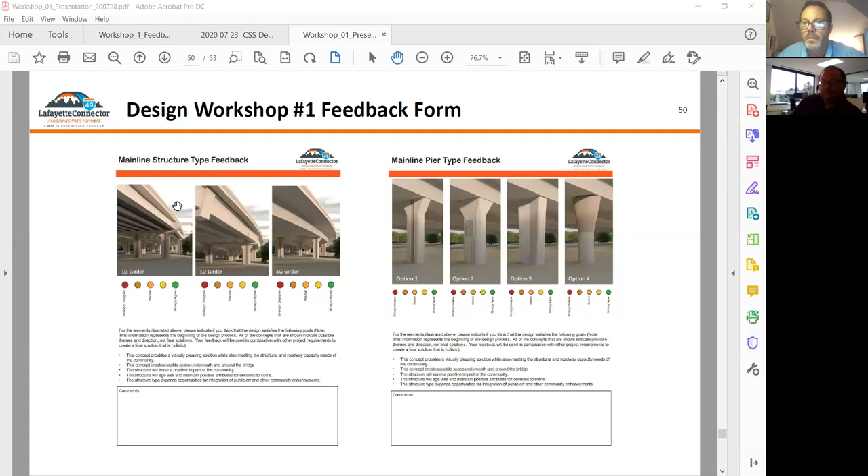So we broke these feedback forms out, and we just kind of wanted to go through each section and talk about each one of the items on the bridge, and just have an open dialogue and talk through it. If you've got questions about any of the structural elements, we can do that. We have a few other things we wanted to cover too. But first, I wanted to start with the feedback forms, just to get familiar with them, and I'm not sure if anybody has filled these out.

Maybe. But to get familiar with it, you've got a grading scale for each of the items, and then you can list some additional comments in there.

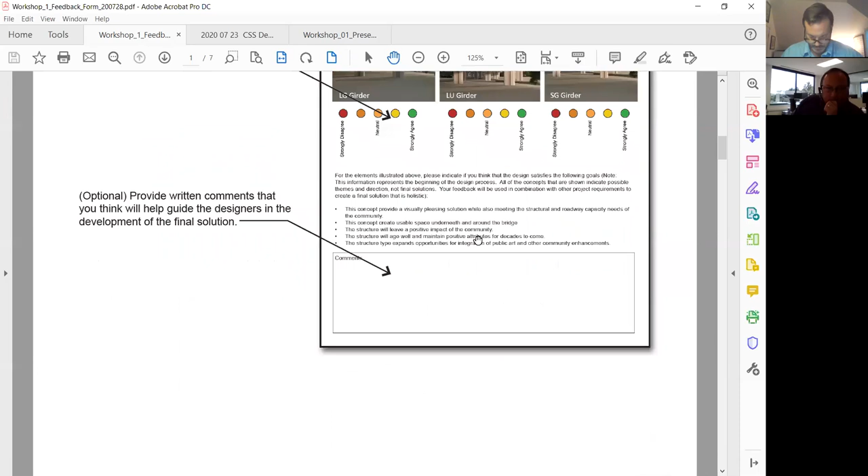So we'll get started with the first one, which is the girder type. As Gary did on Tuesday, we went through 3 girder types. One was the LG girders, which is the traditional I-girder beams that we see a lot through Louisiana. The second girder type is the LU girder, which is still a pre-stressed girder similar to the LG, but a little different shape. And then you've got the segmental girders, which are built differently in different sections.

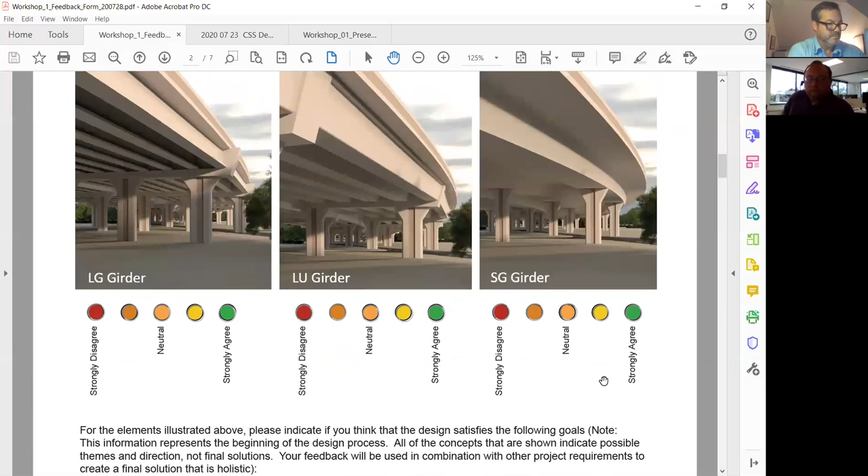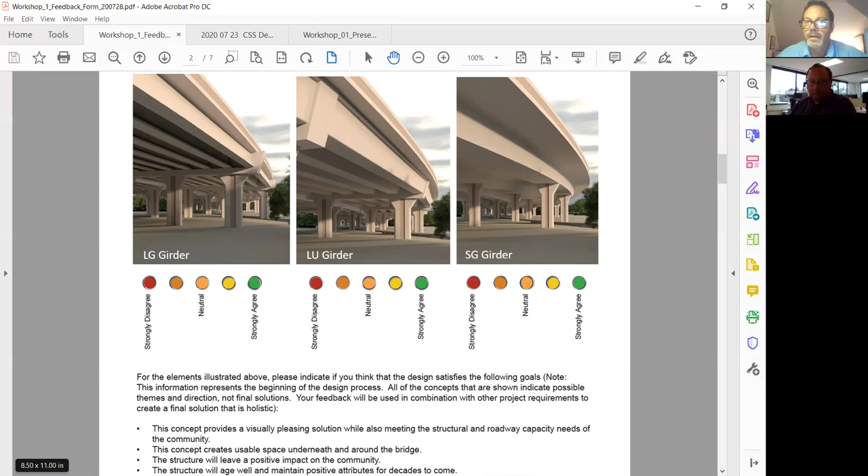So with that, I was just going to see, does anybody have any questions? Anybody have any comments about it? Is everyone off of mute? Jonathan? I think so. It looks like everyone is off of mute. Okay, any strong opinion about which girder type would be selected for the structure?

This is Bob Mahoney. I guess I want to get a handle on the role that whenever we make comments in the breakout room, are we talking as an individual or as a representative of some organization, or how is the input going to be taken and looked at?

My understanding is it's being taken as a member of that organization. The different members of the LCAG organization are made up of, supposed to be, representatives of each organization. So it's not necessarily speaking for that organization specifically, but it is. That's my understanding as well, Jonathan, a representative of an entity.

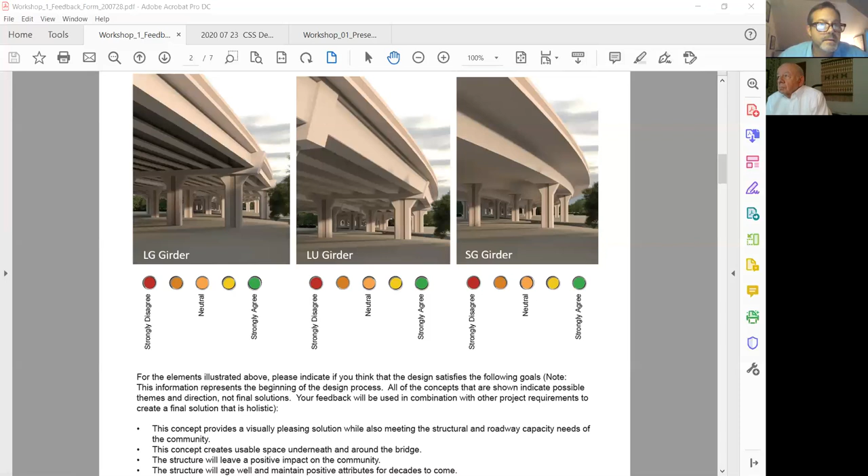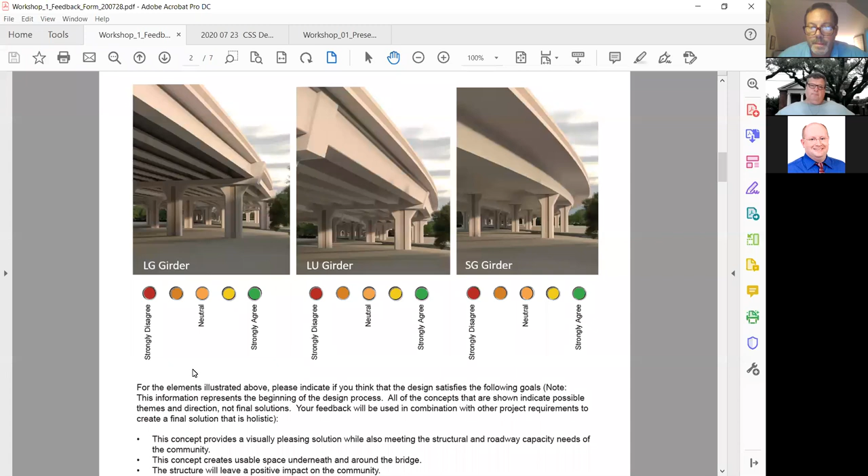Here, based off the presentation that Gary had done on Tuesday. And we can go and look at it. Let's see, I've got the virtual room up here. Give me a second. But it wouldn't let me do that.

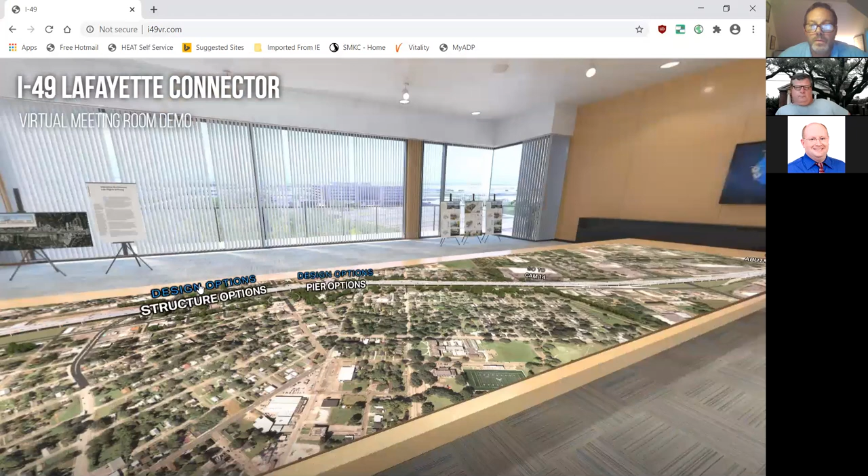When it's kind of highlighted, it's giving you... let's see, there. Yeah, so you've got, y'all can see my screen, right?

And then we looked at raising the structure. So is there, out of everyone here, do you have a preference on the girder, or are you neutral about all of them? Or indecisive?

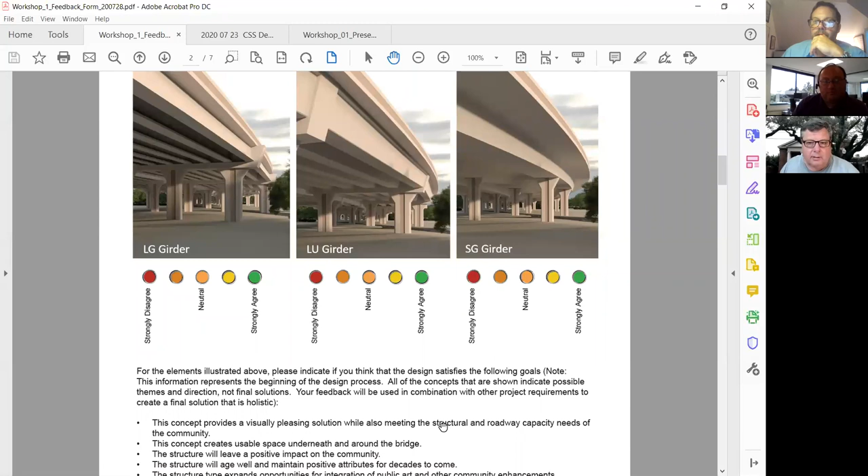Well, this is kind of why I asked the question earlier. It sounds like for me, Federal Highway, I'm going to be neutral on everything. Tom Salmon, you looked like you were talking, but you were on mute because I thought I heard some background noise. If you could repeat what you were saying.

Yeah, it seems to me the SG girder is the smoothest and has the most continuous look. The other ones seem to be, if I was underneath them, more busy. It's the SG girder for me. It seems to be the cleanest.

Although when you're looking at those, they're all very monumental. There probably needs to be some more design applied to the girders to reflect the specialness of the community, whether that's imprints or, as we've seen in examples through the years, how those could be marked with special cultural markings.

Me, the SG girder, because it looks like the most inviting. I wanted to be underneath it.

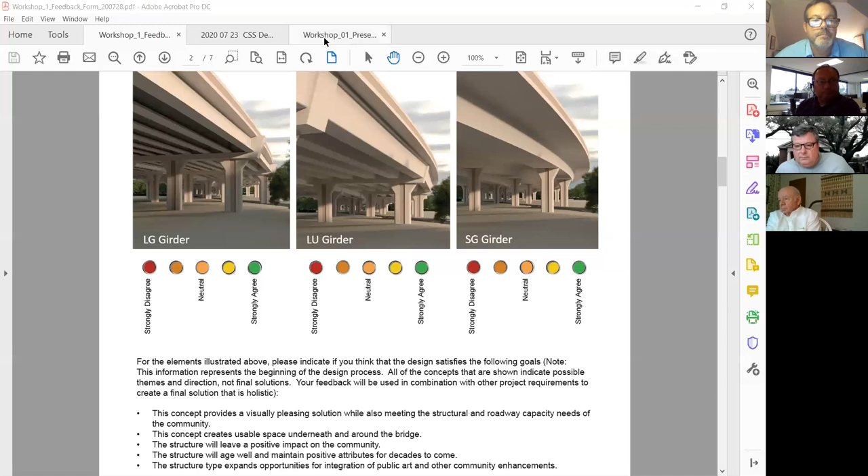But if you remember from the presentation, we had different... let's see, yeah, so we had different category criteria, evaluation criteria for each one.

So when you look through here, it's not to say that red is bad, it's just not as good as the other option. But when you go through here, the SG girder is a costly one, but yes, from a look standpoint, it stands out.

And as far as the aesthetic printing and stuff you were talking about, Tom, that's kind of the next step, I guess. The first step is to try to nail down what we're going to do on the girders and the rails and everything, and then we'll look at doing some enhancements.

It's kind of tough with girders, but these little pieces here at the bents and the rail and stuff like that, we can really make those pop with some aesthetics. It's kind of a challenge with the girders. And the piers as well are opportunities - more so than just the girder itself.

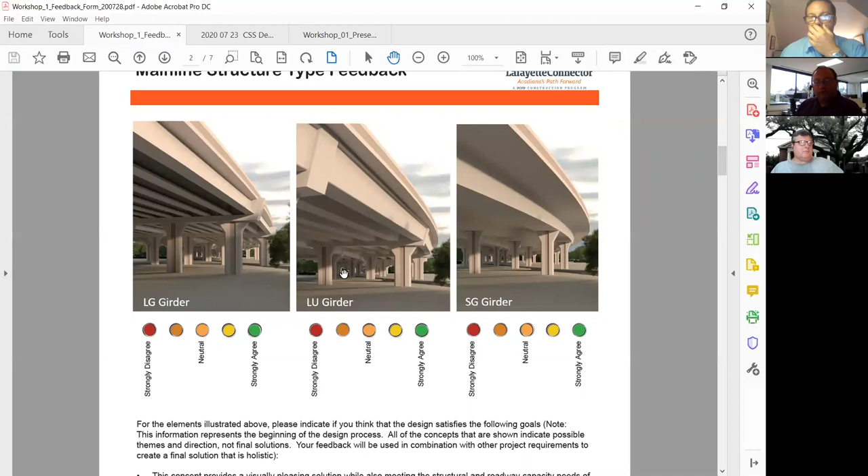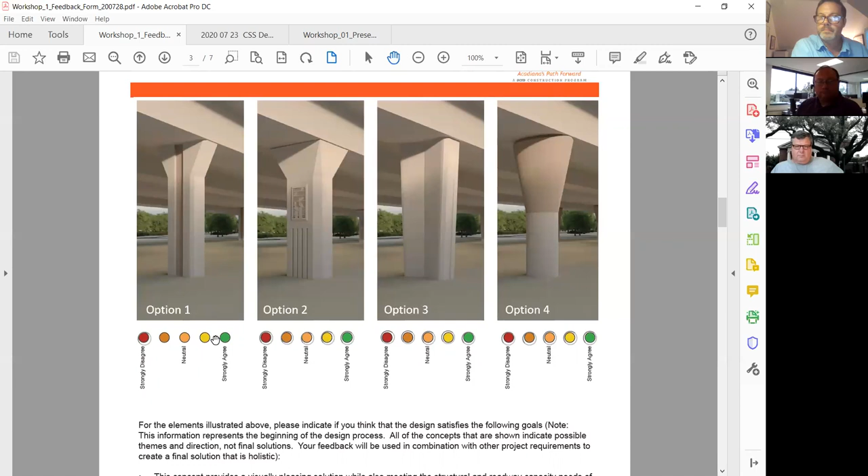Right, which I think is the next one. So I wanted to go to the next one and talk about the different pier types. Do any of these stand out as being more favorable than the other one? I mean, this is almost a traditional pier, and then it has an inset.

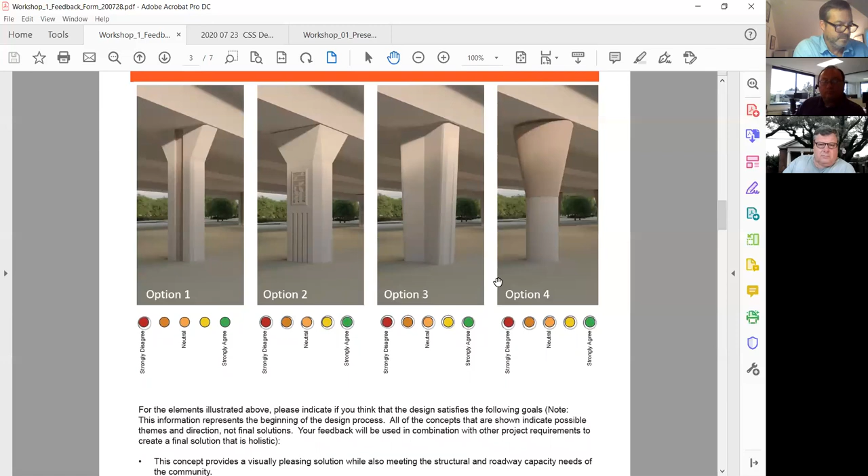Here you've got an opportunity for some architectural piece there. And then these others, it's really just the shape of it. But out of the four options, does anyone really see one that kind of pops and stands out to where that would be the choice of substructure?

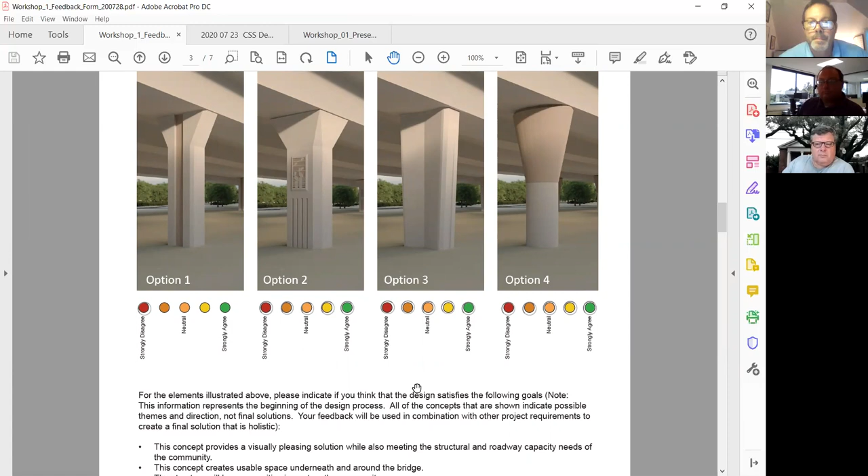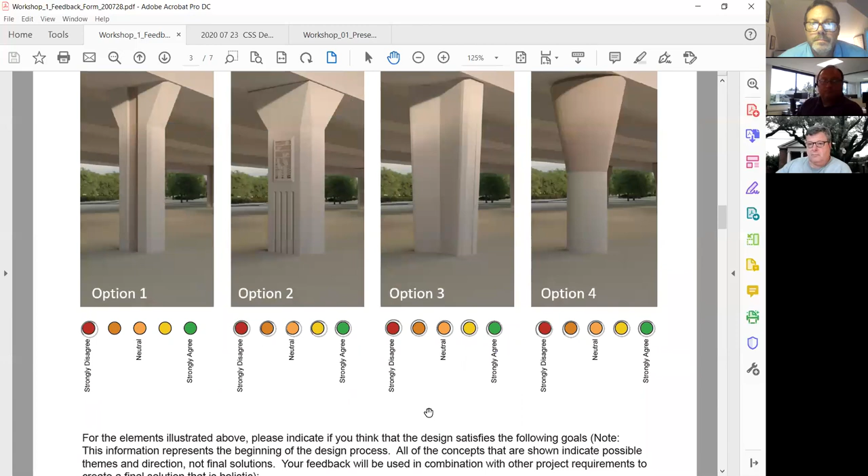Can there be a variety through the project, or does it have to be all one or another? There may be some areas where one type of column might fit in better with the anticipated use. Yeah, absolutely. We've got a long stretch of mainline viaduct, so certain areas that are more visible, maybe we do something more aesthetically pleasing, and in areas that aren't as visible, maybe something a little more standard to cut down on cost.

So I think there's plenty of opportunity to change the appearance of the piers as you go along the viaduct.

I think that's a good point, because at certain exits or interchanges for major roads, such as Johnston, markings on those columns could have an important impact to the cultural enhancement of the place.

Right. If you pick, say, option 2 - and we haven't done an evaluation on the cost - but let's say you pick option 2 at some of those major interchanges, you wouldn't want to run that all the way through and increase the cost. So we definitely have an opportunity to look at a mixture of substructure, like you said.

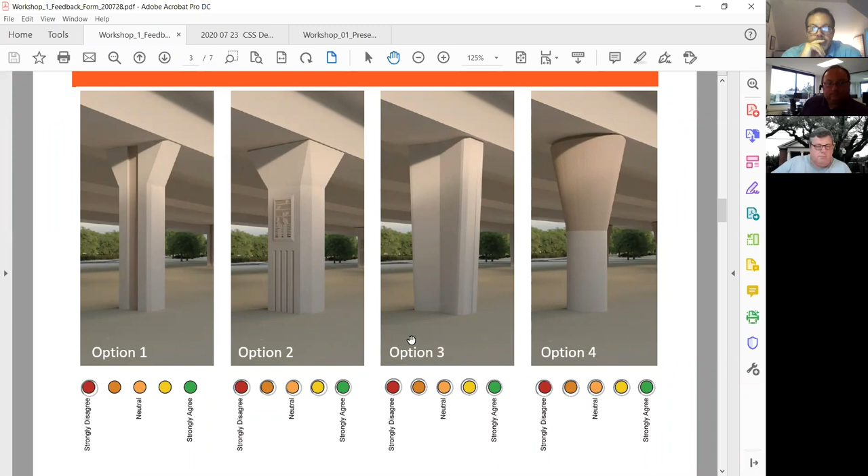Okay. Anybody else? All right.

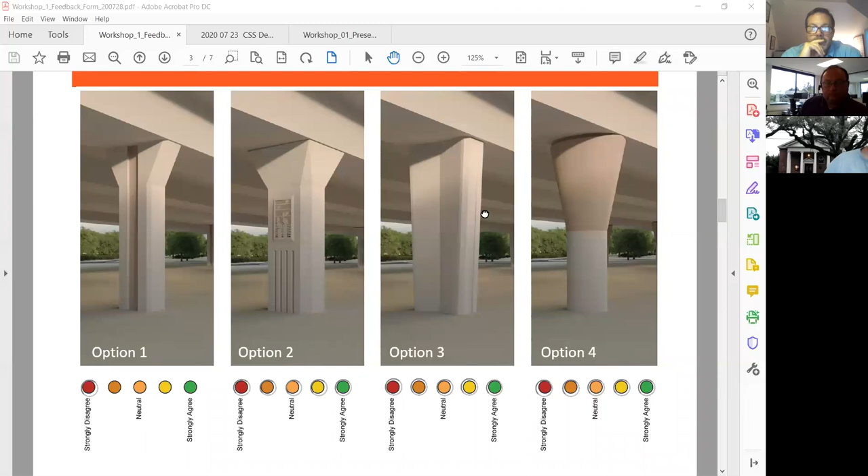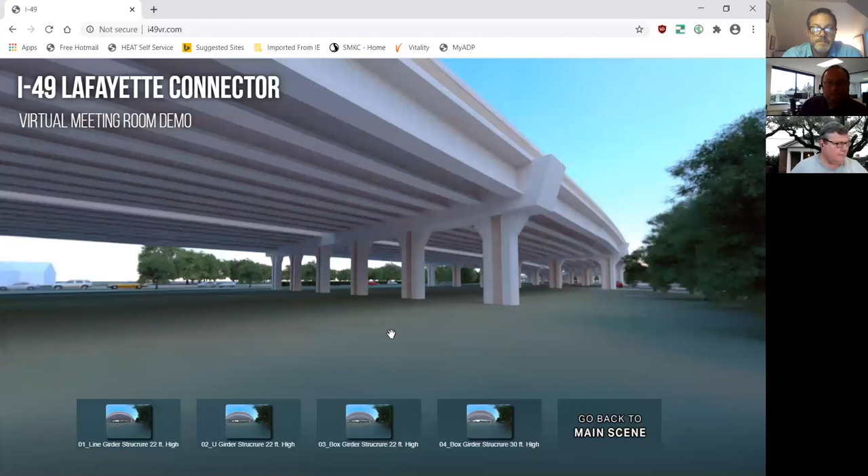Well, we'll move on to the next item, which is the structure height. As I had in the virtual room - I'll go back to that because you can see it a little better - you go from 22 feet of height to a comparison of 30 feet of height. Obviously, when you go to 30 feet, things get a little more expensive. The columns get a little taller, and the design of the columns is a little more challenging.

But like Bob was saying earlier, it may be an opportunity where we can do 30 feet in some areas and 22 feet in other areas. We just wanted to get everyone's opinion on the two different heights, and I think there's a couple of slides in here about the height.

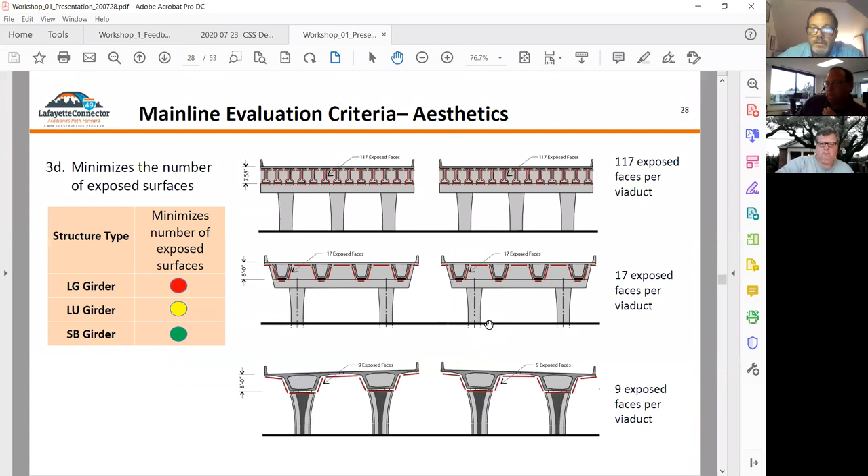When you talk about light penetration under the bridge, you can see the schematic there of the different girders, and of course, if you raise it up, it would just increase the amount of penetration under the girder. So I would say definitely in the urban core, we would like 30 feet with the SB girders to maximize the amount of light underneath, to hopefully try to activate that space one day.

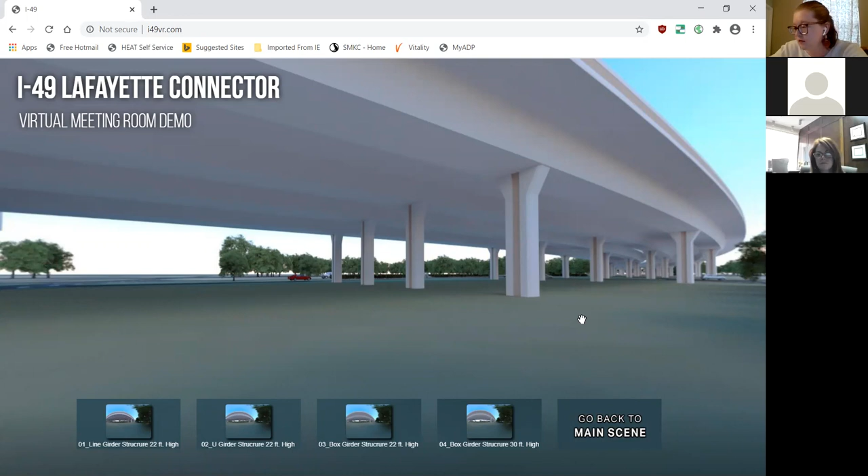I would agree with Warren. I'm late coming into the meeting, I apologize, but I do agree that increasing the height of the connector piece near the urban core, particularly near the McComb-Veazey and Freetown neighborhoods, would allow for more activation underneath the structure in the near future.

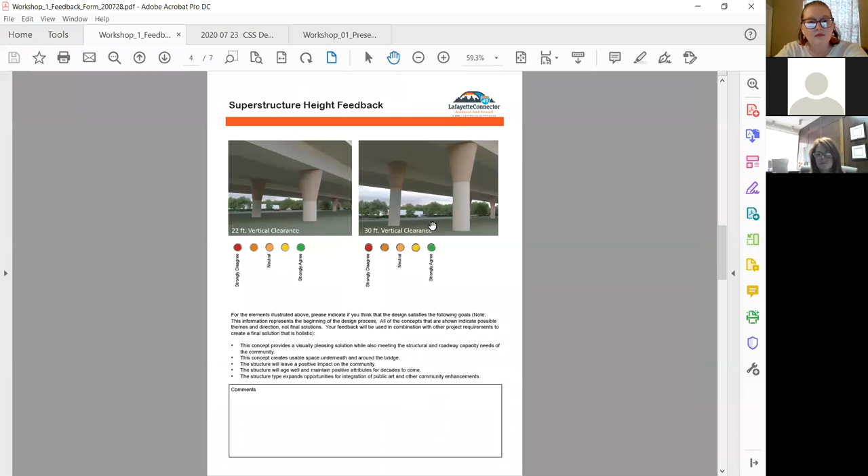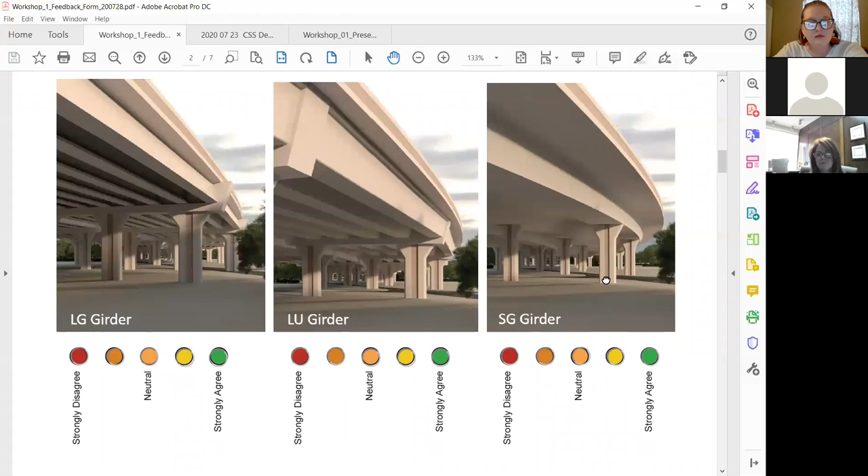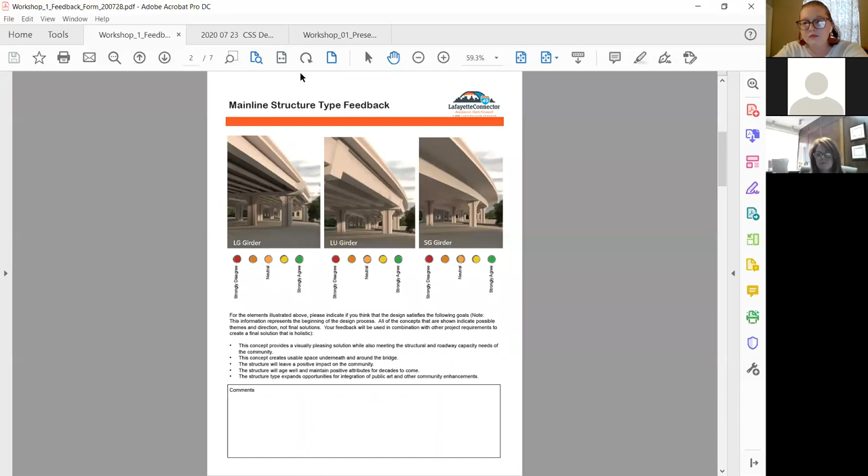Well, Tina, I didn't know if you wanted to say anything about the girder types. We kind of talked about them, and if you had any opinion on that, and also on the pier types—we had the feedback form on both. So I didn't know if you wanted to say anything, or if you're going to move on.

Well, I do have a couple of questions about the girder types. Did we talk at all about the sound underneath those structures? Is any of that mitigated across the different types? For instance, is the LG girder louder than the SG girder when you're standing underneath it?

There's no guidance to say that this superstructure type or this girder type is louder with traffic running across it than another girder type. I can't imagine that it would be much different.

I saw that Steve just joined us. So Steve, maybe you can chime in, but the question from Tina was, is there a difference in noise beneath the bridge depending on which girder type?

Not for these structure types. Mainly where we generate noise in bridge structures is in the joints on the deck, and within these three systems, the joint spacing is very similar. The other thing that helps with sound attenuation is just the concrete material. A steel superstructure—steel beams or steel boxes—would potentially generate more noise than any of these three. So on the scale of sound attenuation, it can be assumed that these three will perform similarly.

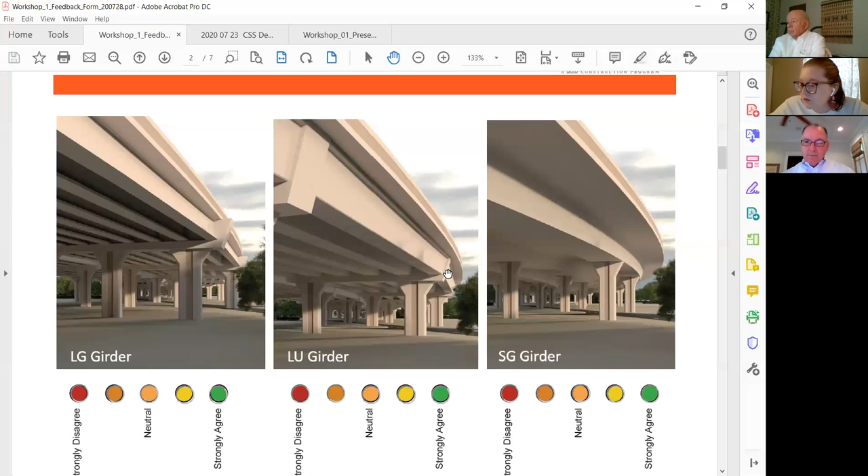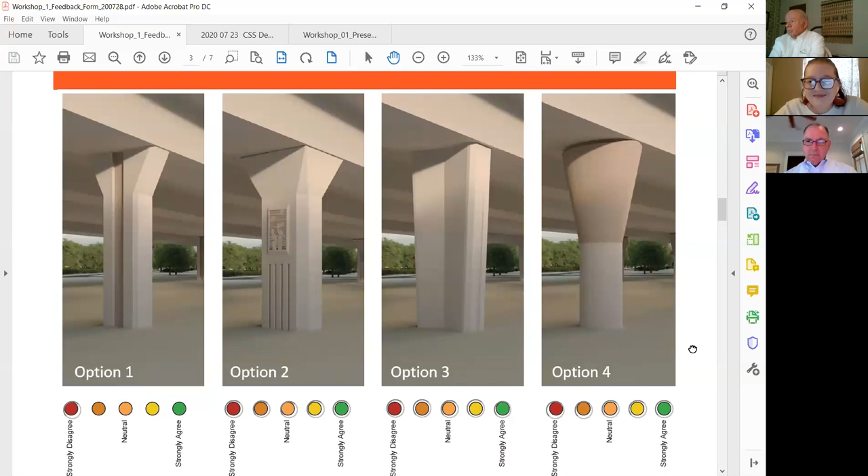Could we go to the style of the pier types? I kind of like option 1, option 2, and option 3. I worked in the planning department when Mike Ollier was talking about crawfish caricatures underneath the interstate, so I'm all about any kind of artistic expression, especially local, that we can have on these. But I don't think we should make it a caricature situation. I like the idea of adding different cultural aspects underneath the bridge basin, and from a programming standpoint, flat surfaces are always good. So I like option 3 because of that.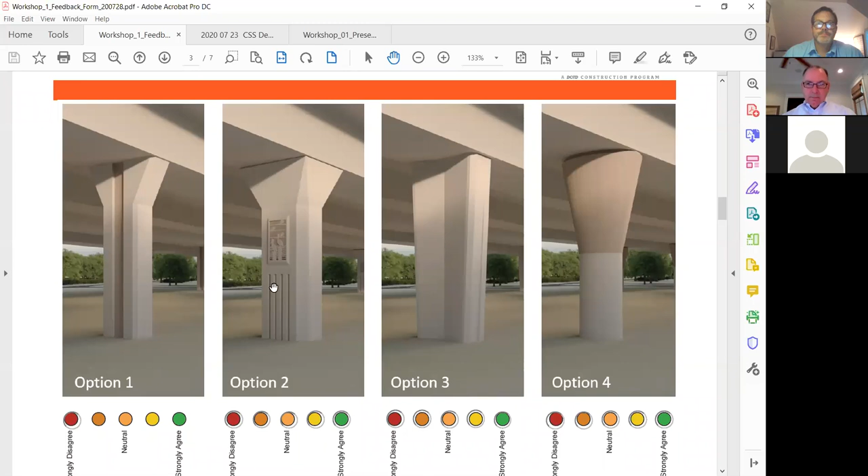Yeah, and we had some discussion before you got on, Tina, about—this goes into the next phase of the study of the viaduct—but there may be an opportunity where we use something like option 2 with some aesthetic feature, and then maybe switch to option 3 when we're not in some of these interchanges. Bob from FHWA mentioned that earlier too, asking if we can change types like that. That's something that would go into the next phase of the study.

Okay, well I do like that opportunity, especially at major corridors where it intersects at places like Johnston and Jefferson Street, almost as an addition to a gateway, even if it's under a connector. So I like that idea, and I know that's the next phase, but that's my thoughts.

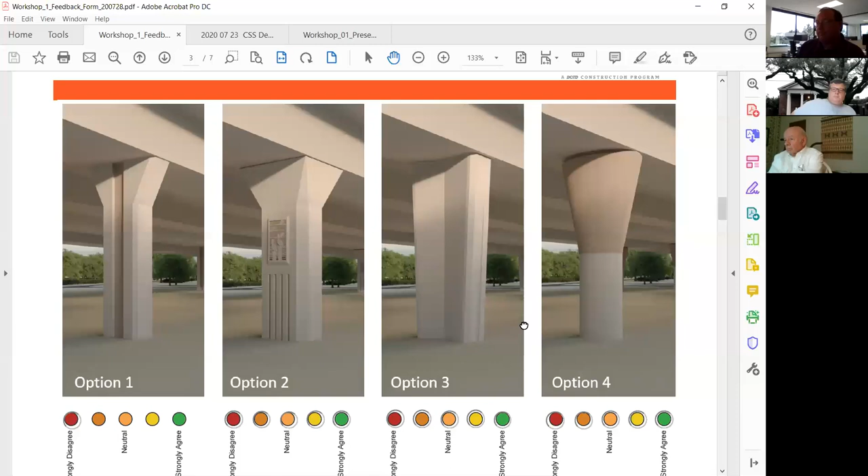So when you jumped in, we were talking about the vertical clearance, and I think we had some comments with similar opinions—some intersections having taller clearances, and in less visible areas we'd do the 22-foot vertical clearance. Any other opinions on the vertical clearance?

Just if it's consistent, let's keep it a consistent length. I don't know if we can do 30 feet, but I think just looking at it from making sure we get the right light, particularly in the communities and neighborhoods surrounding the connector, making sure there's as much free and open air as possible underneath is a good thing. So I lean more toward 30 feet consistently, but if you can find good space where it's lower in areas people may not be looking, we want to make sure everybody's looking everywhere and increase safety as much as possible. So if we can find some kind of consistent middle ground, I think would be good for the whole connector.

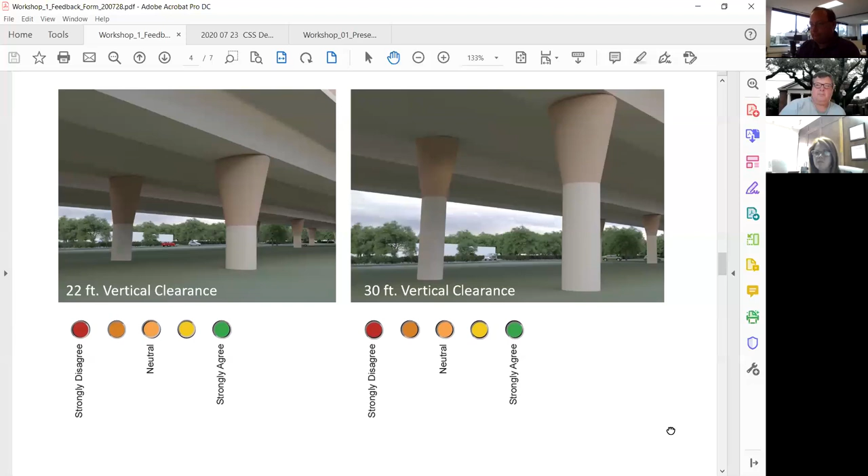I just want to add, I'm listening to all the height discussion, Tina, and thinking about your comment—one thought would be, you were talking about safety, and it sounded like you might feel safer with a higher structure. So maybe some of those concerns could be addressed with lighting under the structure, once you see the scale of this and how far out people see it. I did like your comment about the consistent height, I thought that was very thoughtful, but lighting might address some of your concerns.

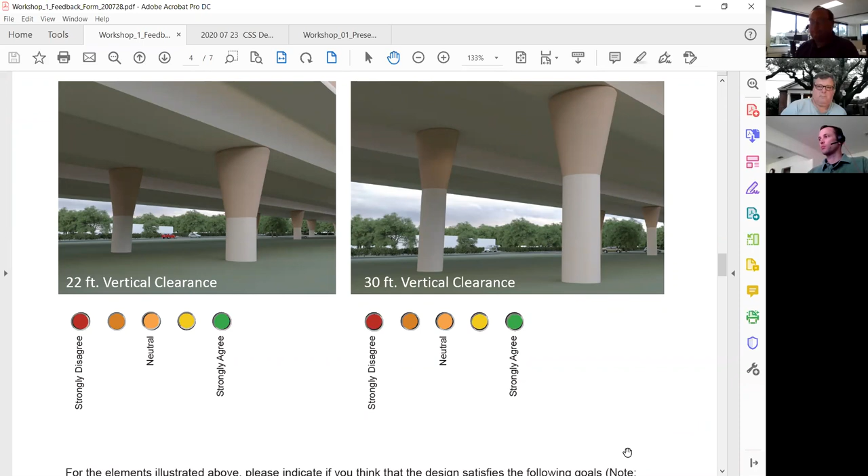Thanks, Sherry. All right, thanks, Sherry.

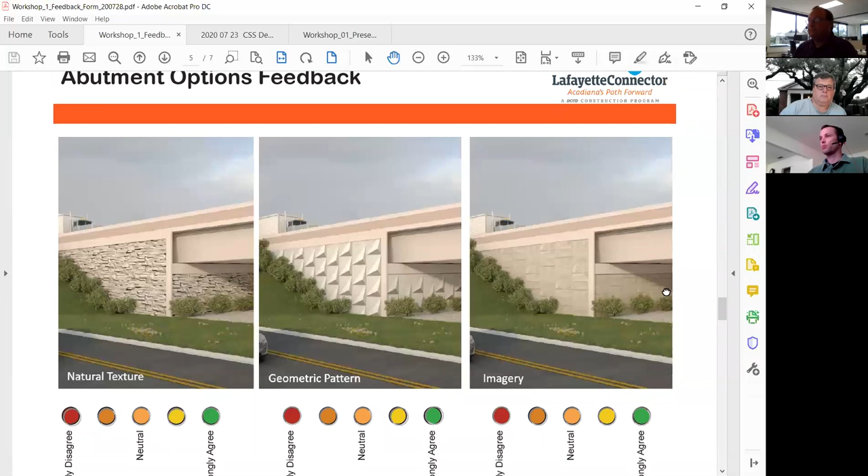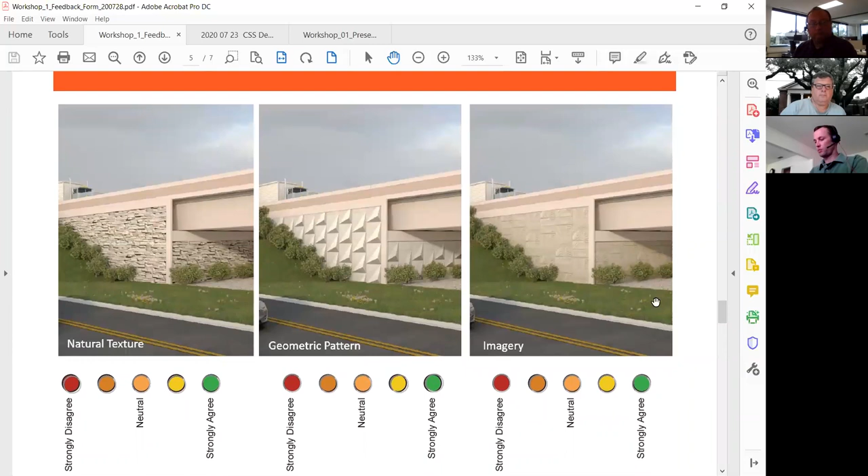Okay, we'll move on to the abutment options. So for the mainline viaduct, we'll have the abutment at the south and north end of the project. As Gary went through each of these options, these are three different textures. So I just wanted to open the floor and see, does anyone have a strong opinion about one, or none of them, or a mixture, or something different? Or any questions about it?

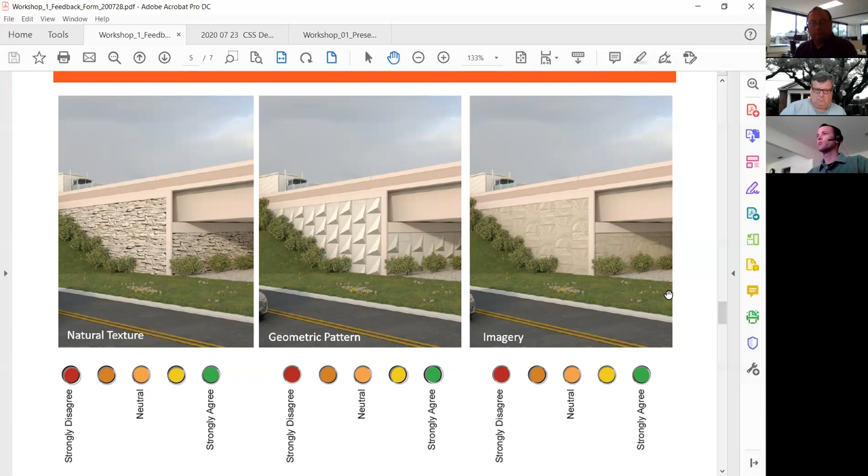Where are these abutments going to be at? It's where the structure comes down to the ground—south end, close to the airport, and then at the north end, close to I-10. And then possibly the ramps, I guess. That's true, yeah, at the ramp.

And those areas will definitely have walls, or is it possible to have an embankment? I think most of the ramps we've looked at to date have walls, so you'll have a retaining wall system. Some are shorter than others, and it really depends on where it is. I don't remember the whole layout of where the longer walls are.

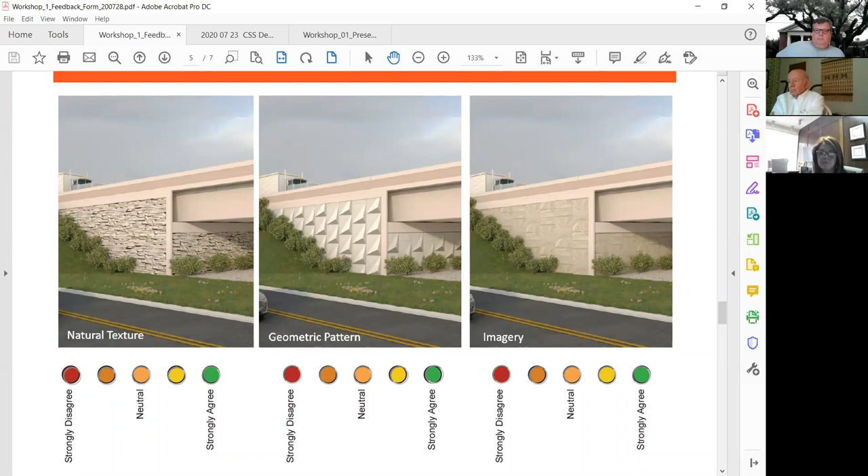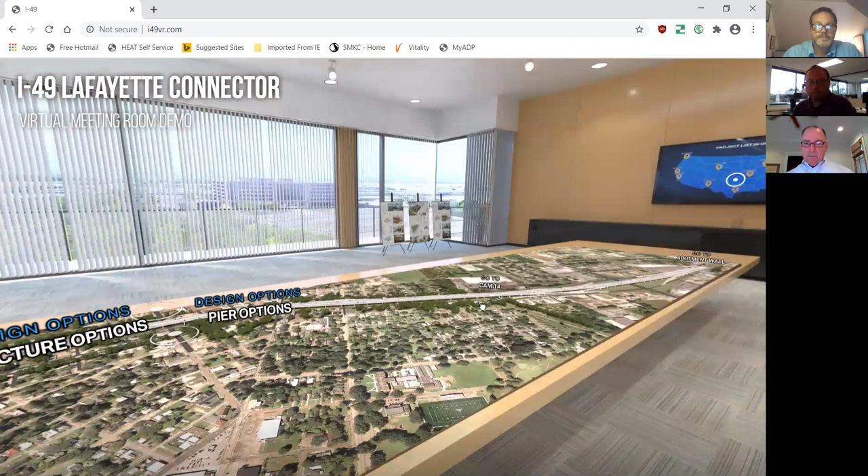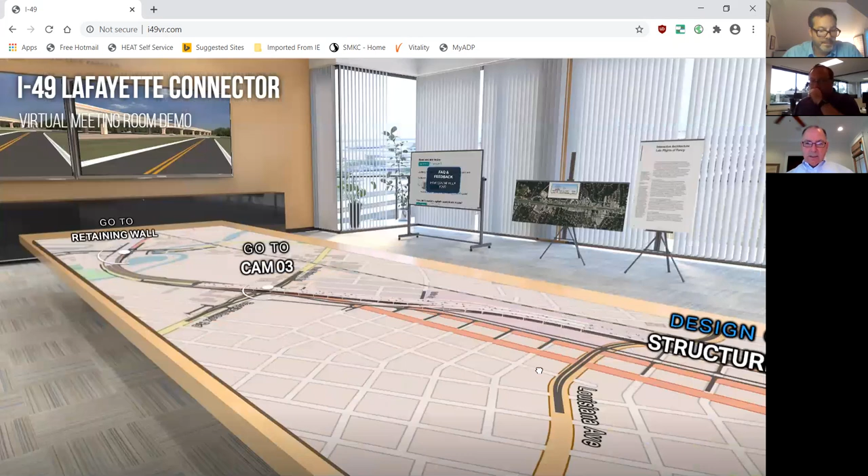With the current alignment we're working with right now, many of the tall walls have been eliminated. Probably the most robust walls in the alignment right now would be at University, because that's somewhat a depressed section to respect the flight paths from the airport. But as Tim mentioned a few moments ago, this is University, that's a view at their turnaround and into the intersection.

That's kind of the three different options, like Steve said, at University. So these aren't exactly what they would look like, I'm very clear on that.

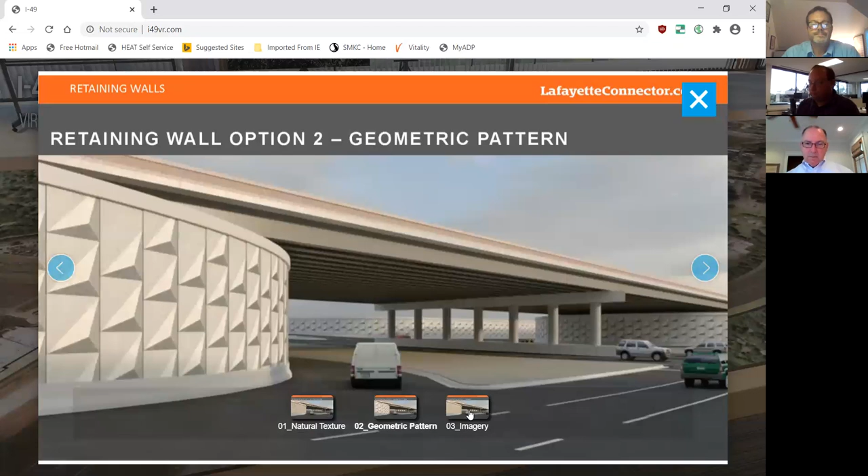But how flexible are we with the design of these walls? So like the imagery, for instance, if we wanted a crawfish or crab or something on the wall, is that possible? You can have it here. The flexibility of these walls - in structural terms they're called MSE walls, and they're made up of panels. So within the casting of these panels, we can introduce form liners with a multitude of different images. So in answer to your question, yes, there's quite a bit of flexibility for creating that cultural image that the community would like.

So my next question is, how much do we value paying for culture in our community? Enough for our interstate. I mean, it's beautiful, but what I'm saying is we're asking to make decisions on things, and I'm looking at it from a beautification standpoint. What could happen if we had to deal with this interstate in our community? But the things we say we think are important as far as culture in our community, and recognizing our historic districts and the significance of those things, how high in the priority list will beautification things like this be in the design costs?

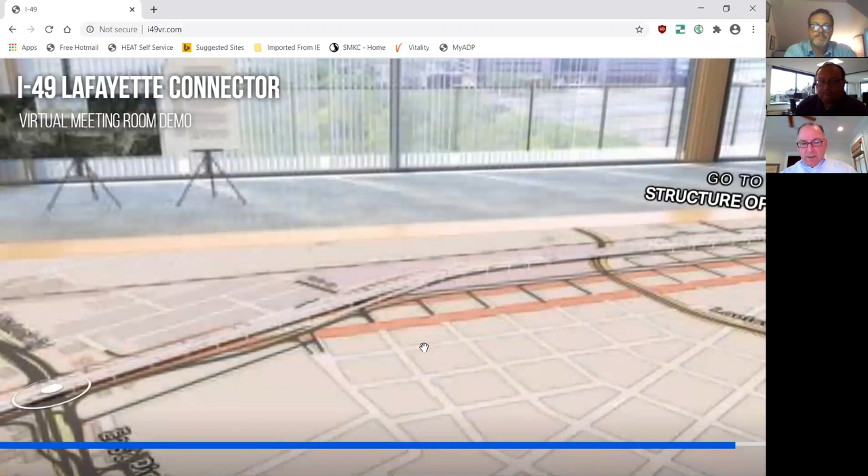I want to be careful not to go too far out of bounds on this, but what this workshop is discussing are the structural elements - the bridges and these walls. I will say with these walls, there is a lot of variability, a lot of aesthetic features that can be incorporated into these panels for very little cost. Because it's essentially just a form liner that's in the forms, a neoprene form liner that can be reused - once the imagery is created, it just gets repeated in those concrete panels. So in relation to that particular element of the project, there can be a beautification factor for very little cost.

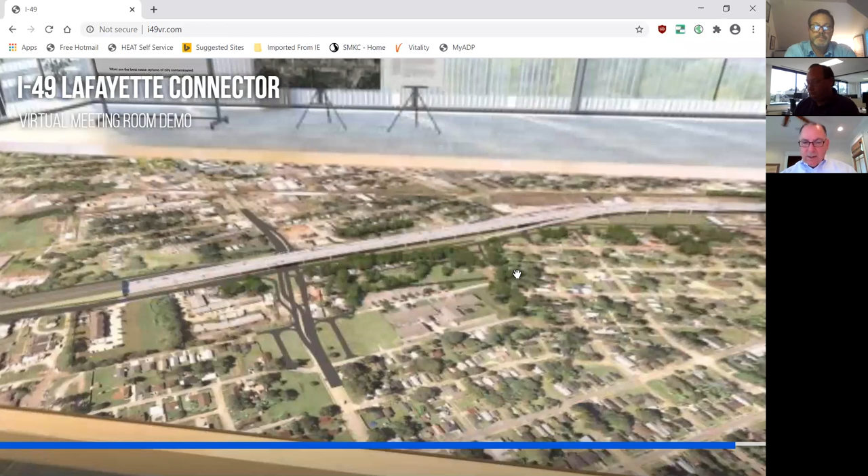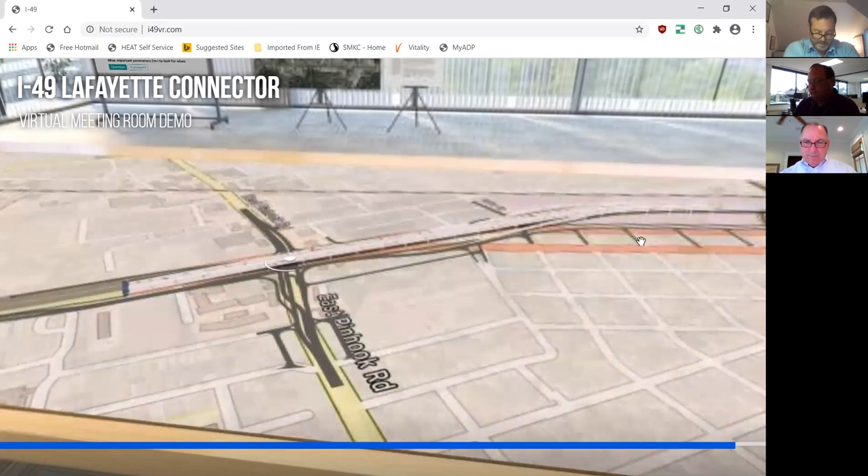I don't know if that answered your question. I think it's close enough, because it's a conversation we're going to continue to have about this structure, about how things are funded, who's responsible for that funding, and how quickly that funding will be activated. It's a continuing question, so just keep it on the list and consider that when you have responses.

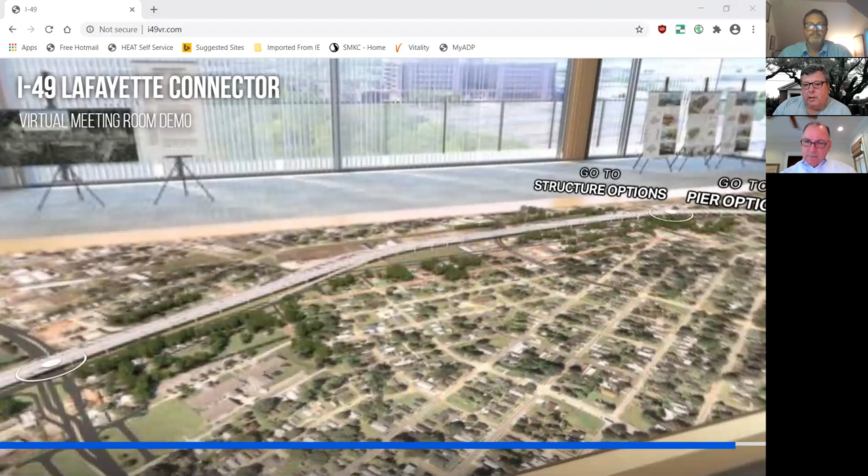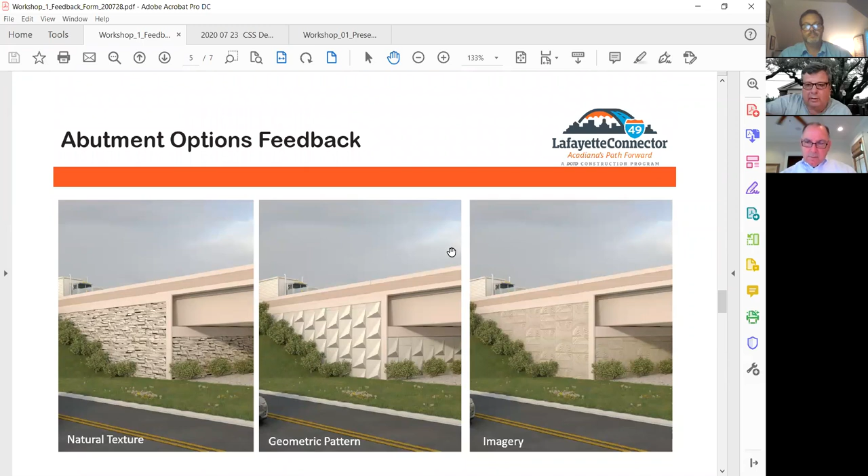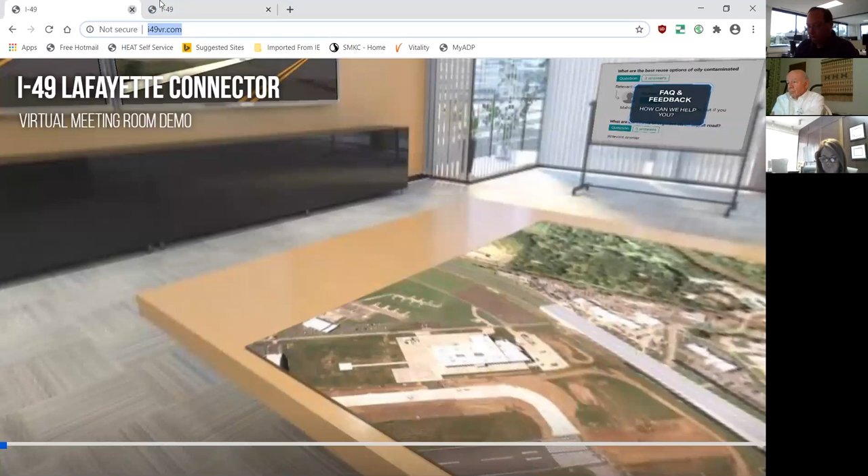It goes back to this discussion of scale. Look at the size of that wall versus the car, and anything you can do to help break down that mass, like you're talking about, Tina, preach. I think it's very important that every time we have a chance to break down the mass, this thing is huge. It's going to be a monumental ribbon that goes through our community. And the more ways we have to break down this incredible monumentality, to bring that back down to the scale of the human, is going to be in the best interest of the community.

I mean, look at that car. Look how tall that wall is. It could be somewhat accurate, but you're looking at a wall that's almost 40 feet, and it's the texture that's going to break down that monumentality. Anytime we can do that on piers or on bridge decking, I think that's important. With that, or landscape, I agree with everything you're saying, Tina.

Just that, and I would go back and keep talking about cost. What's the cost if we don't do it? How does it impact the communities that abut that and surround that? Would you want to be next to that every day? That's brutal. So how can we make it a much more inviting element for a pedestrian, or even somebody in an automobile?

That's very true, Mr. Simmons. And here at university, with the geometrics being looked at right now, the height of the wall may be a little bit lower than this, but as we get into more of the CSS and the community context, there are also opportunities to tier these walls and create a little more interest. Anytime we can create multiple lines and setbacks, it does create a little more interest. And those things are not very cost intensive, but it's just part of this input process.

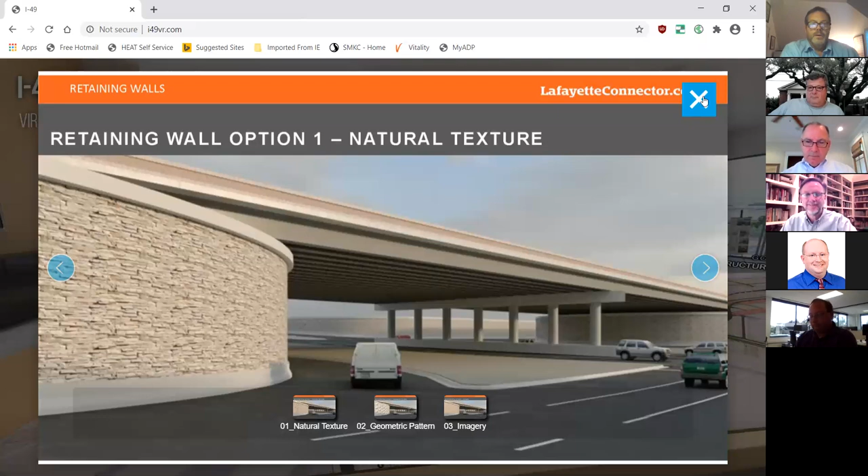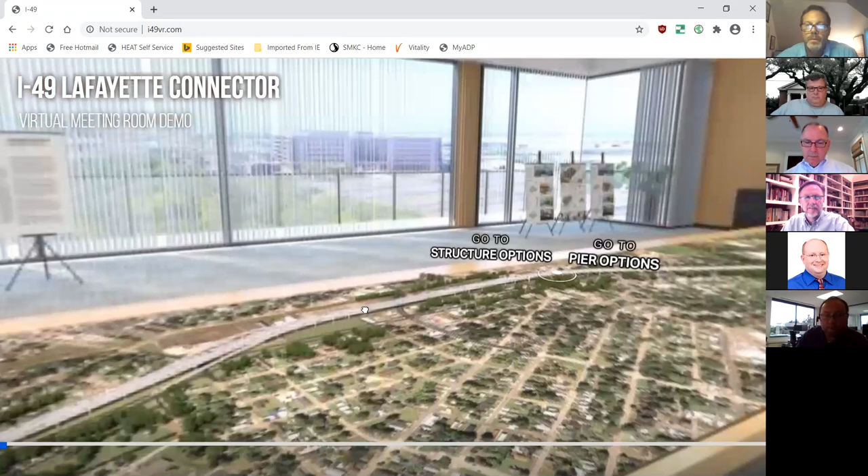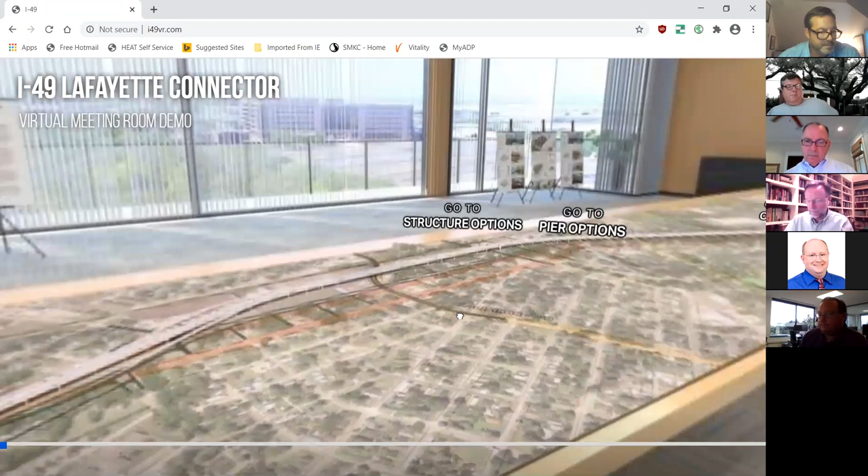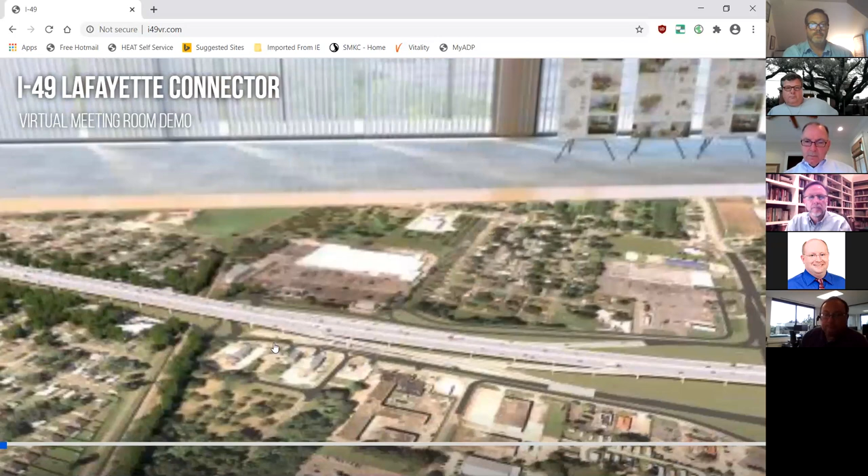That was good discussion on the aesthetics of the abutments. While going across the virtual room, you can kind of see where some of the ramps come down. It's a bit fuzzy, but each one of these ramps where it comes down will probably have something similar as far as an abutment and a retaining wall. Like Steve said, most of the long walls have been eliminated, and we've got some short walls in some areas. But that's something to consider too - each one of these ramps will have the abutment.

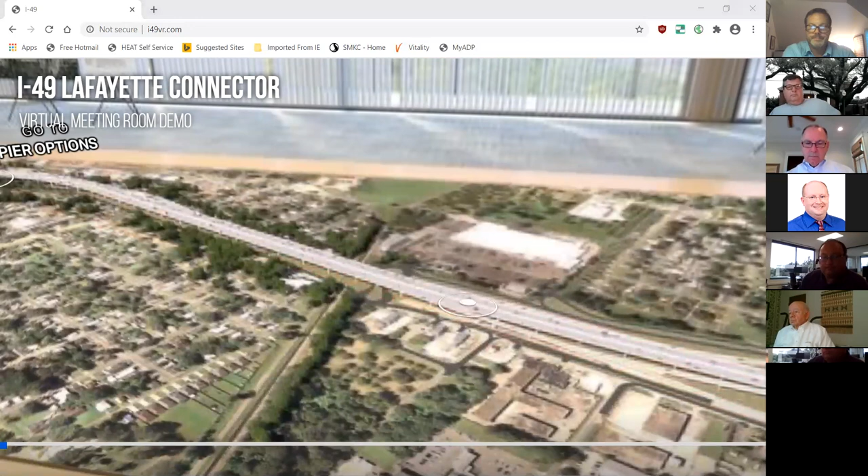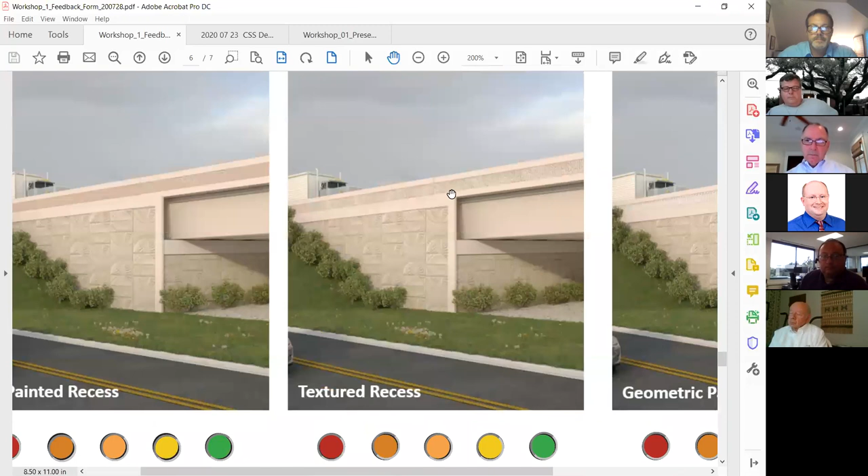All right, are we ready to move on to the barriers? We want to talk about the barriers real quick since we're on the topic of aesthetics. Barriers are a little more challenging to see, but you can see there's different designs on the back. Any questions on that? I think that's just a painted one. This has a rustication look, and that's some kind of geometric pattern there. So any questions or discussion about that?

Brian, just dimensionally, these barriers on this project will be 36-inch tall. Correct. So the barriers are 36, and this inset is probably about 2 feet. Maybe 2.5.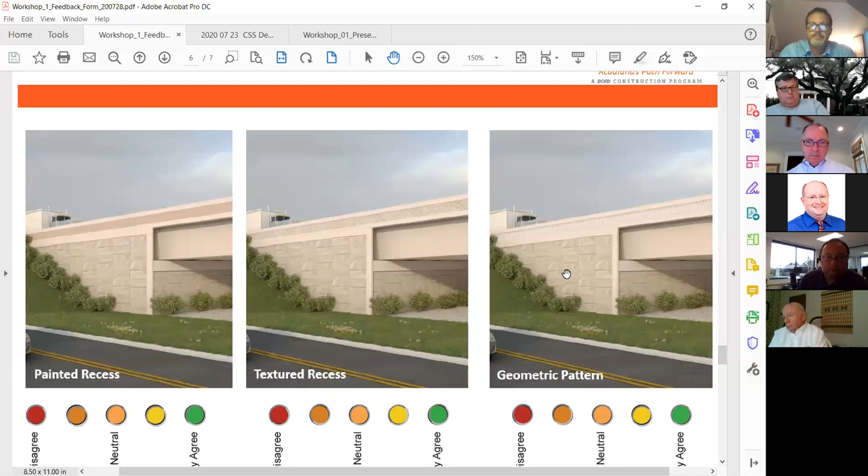So any strong opinions, disagreements? Neutral?

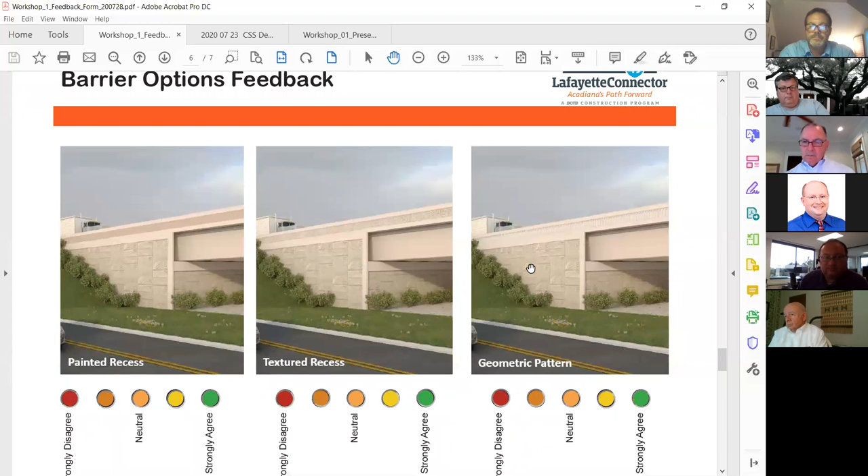Just in general, what I'm hearing from the conversation is that opportunities to make patterns specific to the district or region - that's important. Whether it's a crawfish or land or all kinds of other culturally significant objects, it's one way to get the community involved in designing them.

One thing I'll speak to - Tom, you mentioned several spots trying to find a way to decrease the scale, decrease the monumentality of the structure, and this is just another opportunity. It kind of breaks up that thickness of the girder and the barrier, having an opportunity to do something within that strip, rather than having that solid structure come all the way down. It introduces an opportunity to still do an accent, and my understanding is the cost is similar - not a huge cost to do that along the back of the barrier. That's correct, Jonathan. This is another application for form liners, where they're introduced into the slip form and for very little cost create imagery on the fascia of the bridge.

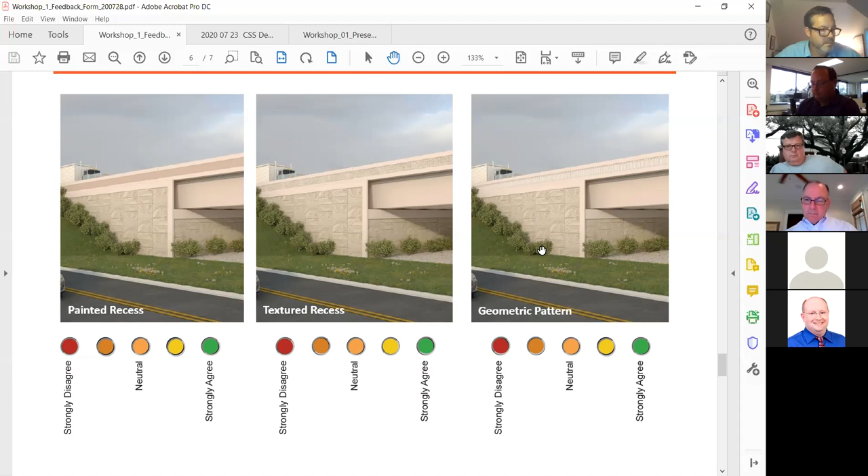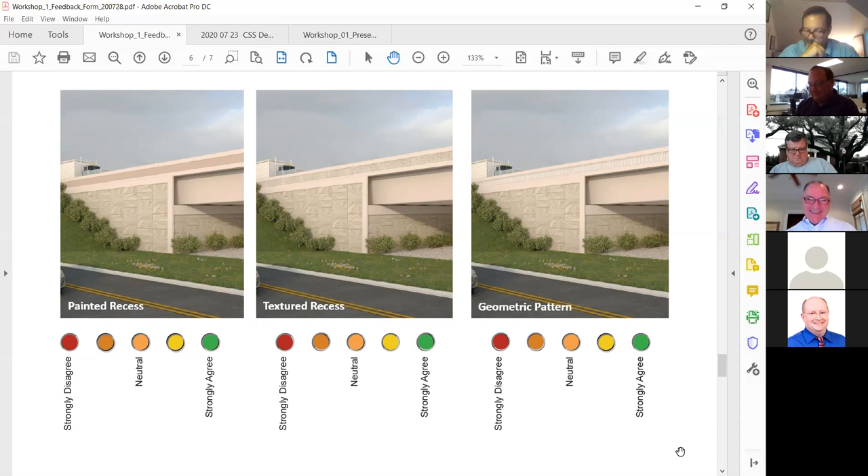I also want to add that I don't want to see a bunch of crawfish all over this interstate. So I just wanted to add that. You don't want to see little crawfish running this way, along the rail? Well, no, I don't mind crawfish. If we ever wanted to have an I-49 crawfish boil, I'm always down. But it was just an example because I worked in planning, and we always talked about crawfish - that's what came to my head when we were talking.

But really, the design aspect of it and the beautification - as Tom said, it would be a great way to get the community engaged in this project and plan, and actually have some ownership in it, because right now it lives very much in DOTD's hands and in the city of Lafayette's hands, and it's not in the community's hands. So I think it would be really good to help bridge that with those beautification aspects.

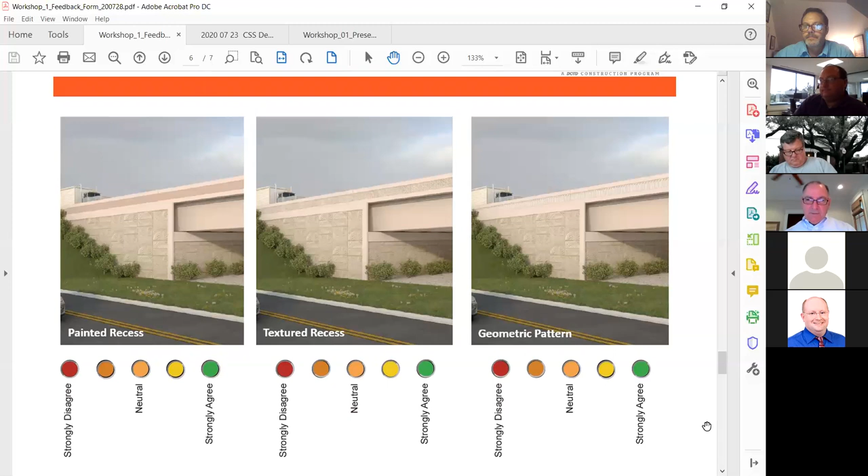That's very true, Tina. As this process begins to evolve and we begin integrating the CSS process, one thing is that as we drive along the outside of the structure, there's opportunity to create those eyeline imageries that flow through the structure. It helps to minimize the monumental scale of these structures. So it'll be fun to go through those exercises and create the imagery that the community wants. And we got it loud and clear - crawfish is not on the menu.

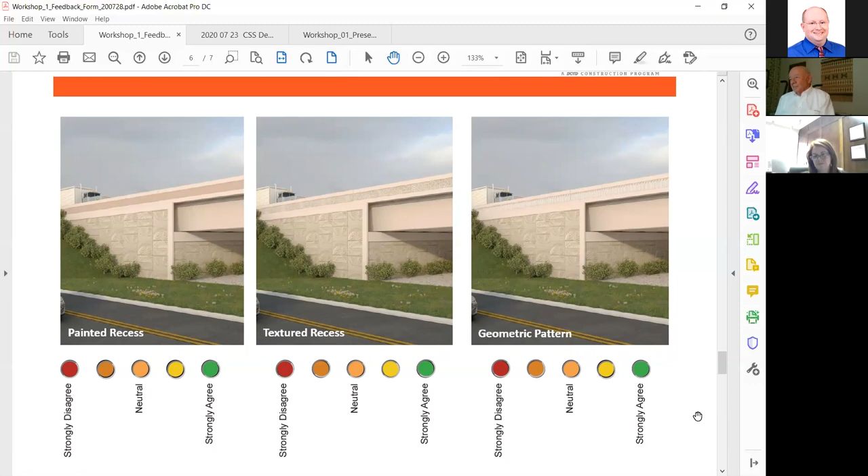All right, we got a couple more items. We kind of talked about the retaining walls already, but is there any other comments about the retaining walls we want to discuss? I know we've talked about it a good bit. I think it occurs at University and one other location - is it another location, Steve?

I can't remember. This is the greatest magnitude of wall along the viaduct, at University. The other areas probably have maybe 25% the scale of these in terms of wall area and heights. Yeah, and it's mainly where the ramps come down. Correct, yeah.

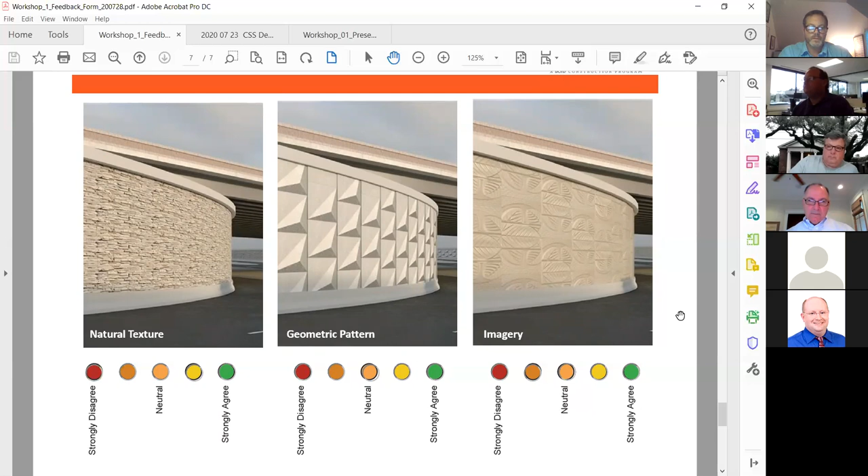So I know we had good discussion on the retaining walls earlier, so wasn't going to spend too much time on that. And that's kind of the feedback form. Does anybody have any questions about any of the criteria as far as maintenance of traffic or the construction cost, or any of those items we want to go back through and talk about a little more?

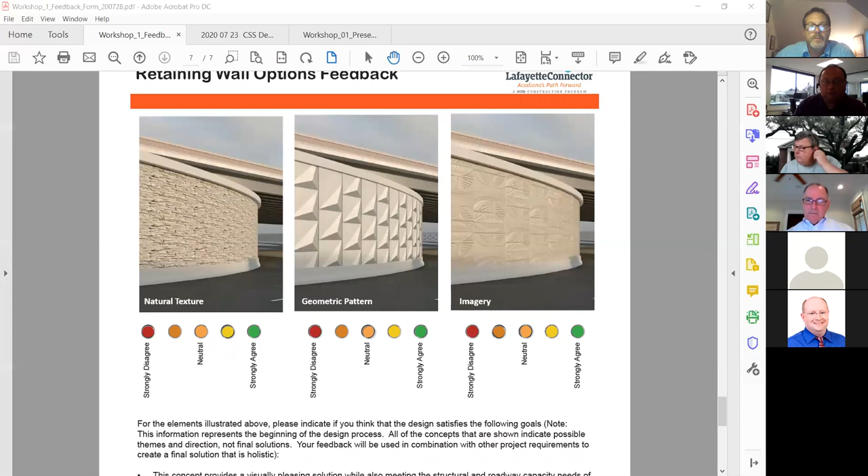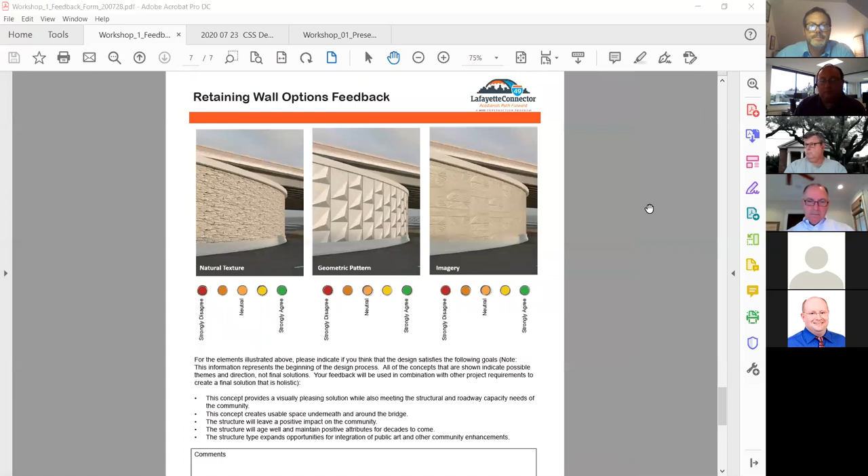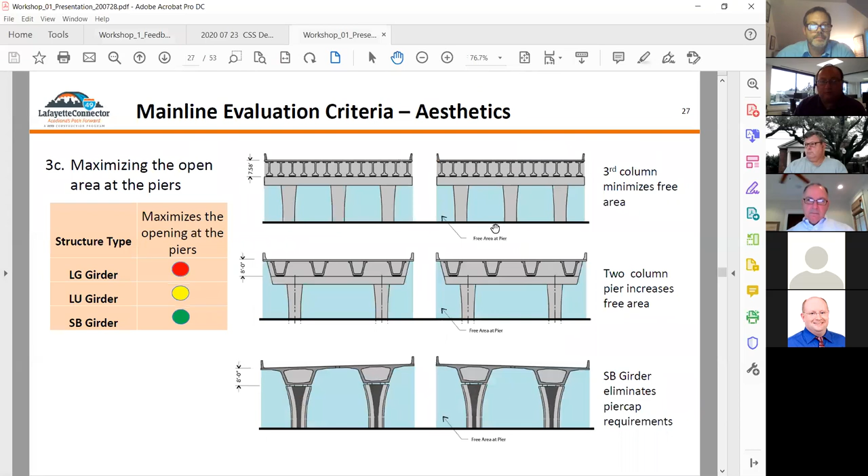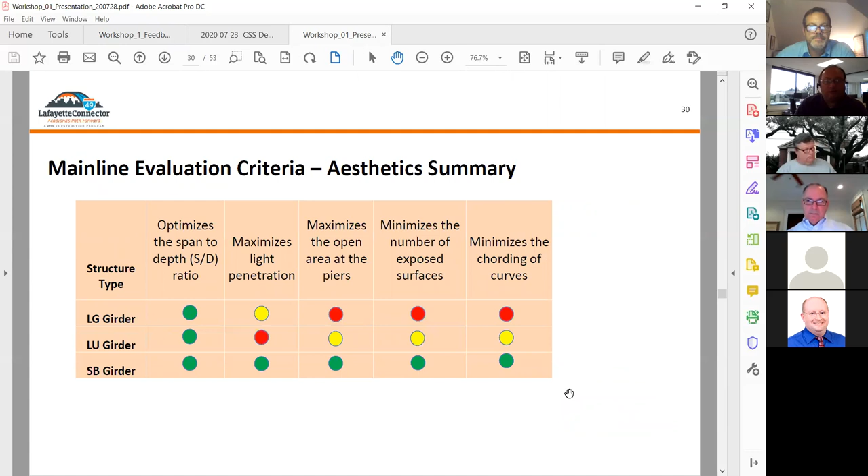Hey Brian, you may want to pull up the evaluation matrix part, the red, yellow, green, so people can see the criteria. This? No, I think you go back. There's one in the presentation, I think. Yeah, there's kind of a summary that shows, you showed a little bit earlier. Yeah, this one here. There's also another one that has more stuff in it. Yeah, this one, that one. Okay, talking about the maximizing. Oh yeah, that's the girder. Yeah, just the girders, that's just the aesthetics specific to the girders.

Okay. And then these are the three main criteria that we looked at: construction cost, MOT, and aesthetics. So just wanted to see if anybody has a strong opinion about which one is important to them, which one you have questions about, if you have questions about all three or none, or just open it up and see what y'all want to talk about here.

Is there one that... Tina, I know you've been pretty active in the call. Is there one of the criteria that you feel is most important? I know we've talked a lot about the aesthetics, but do you have any comments on the cost or the maintenance of traffic?

Well, I think this interstate is going to be expensive no matter how much we talk about it, so I think it's going to be something we all have to bite the bullet on paying for, whether it comes or not. But as far as moving traffic, and with the railroad, I'm not sure if we talked about that conflict there. But when the railroad passes, it shuts down Johnston Street. It shuts down any street that intersects, and Jefferson Street becomes the one tunnel that everyone tries to run to. So for me, height—of course I'm always going to say the SB because of height, and I think it just looks nicer than the other girders. It hits all the green boxes for me as far as traffic and aesthetics, but the cost is going to be what it is. It's going to be an expensive project.